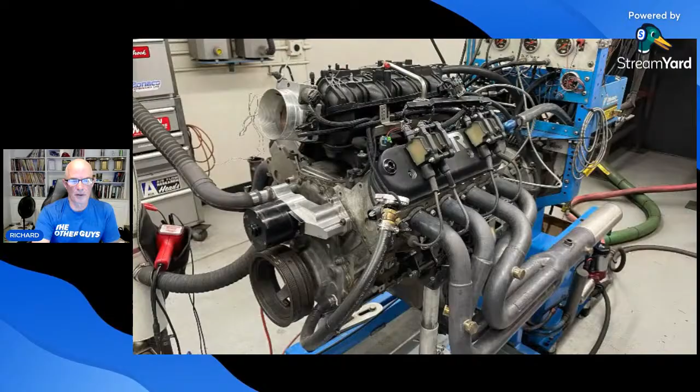We're going to take a look at different power curves of a couple of different turbos. We ran a GTX 3584 RS turbo and a G42. Mostly what I wanted to talk about was showing you the power curves of these things. In fact, this will end with a demonstration of the power curves. You can see we have the NA power curve down at the bottom there. This one was with a G42. Let's check out this one here.

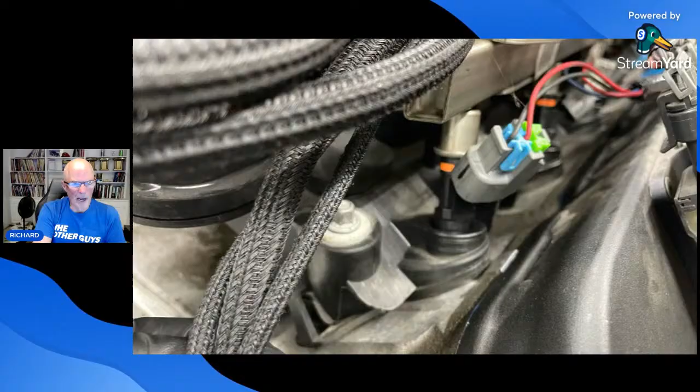The motor was my aluminum 5.3. We had a Trailblazer SS. We had my low buck truck camshaft in it. We had the 1000cc injectors. We had that G42 turbo. Stock exhaust manifolds feeding a Y pipe. We had our little boost controller there. You can kind of see the setup there going in. And for some reason, I used the same power curve on both of these, unfortunately.

But the thing I want to talk about is we take a look at raising the boost and we have our NA power curve. We raise the boost, the power curves are basically staying consistent. So this thing is making peak power when it's NA at 6,000 or so, and it basically holds level in terms of power almost out to 6,500 with that particular camshaft, the low buck truck camshaft. The Trailblazer SS had stock heads on it, it was on a 5.3. And we see when we add boost, if we can get the boost to stay consistent, it kind of mirrors that.

And so the question becomes, well Richard, what if I want to - first of all, do you want that kind of curve? Do you want to be making peak power at 6,000 and have it hold steady out to 6,500? Do you want peak torque occurring at 4,700 or 4,800 RPM? This thing made more than 900 horsepower fairly easily with the G42 at like 15 pounds of boost. And then it made more than 800 with the smaller turbo at a similar boost level, only because we're getting up near the flow limit of the smaller turbo in that instance, and we're not anywhere near the flow limit of the larger G42 turbo.

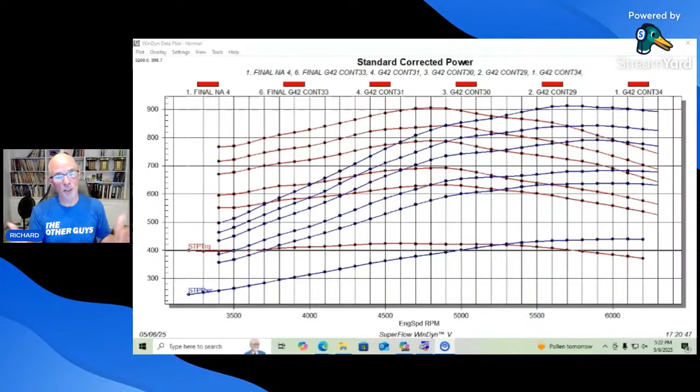This one had a Trailblazer SS, which is a long runner factory style intake manifold. Makes really good average power production. I mean, even down near 3,000 RPM, we're making 750 foot-pounds of torque. So it's a lot, it's tire roasting a lot. So when the boost is turned up, you have some room to make less torque down there if that's what you want to do. 750 foot-pounds, if you've got a 3,000 RPM stall converter on something and you nail the throttle with 700 or 750 foot-pounds of torque, it's going to spin the tires a lot.

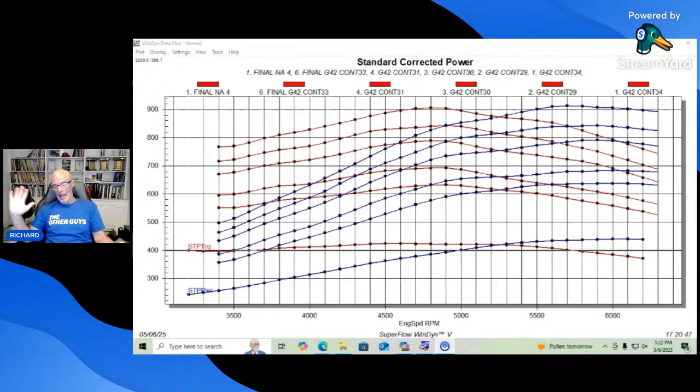And so if you were thinking, okay, well, I could afford to give up a little bit of that, and now I want power to happen out at a higher RPM range, you put a shorter runner intake manifold, the BTR Trinity intake manifold. Shout out to the guys at Brian Tooley Racing. We are a dealer, by the way, if you guys are interested in BTR stuff. Richard Holdener Performance, where you can go get the turbos that we use in this and the camshaft and springs and all that. We have the BTR stuff.

So you could put a short runner manifold like a Trinity intake manifold, an equalizer, a Holley low ram, a high ram for that matter, if you have the hood clearance that you want to put that kind of manifold on there. The nice thing about a low ram or Trinity or others that have those kinds of things, or the Sniper style intake manifold, that fabricated one that's so popular out there, fabricated intake manifold that is still fairly short runner, that will fit under the hood.

And a lot of times that's the thing. I'm sure that's why the guys at BTR sell so many of those manifolds, is guys want a short runner manifold that they can run more RPM with, that will also fit under the hood with a boosted application. There's no boosted intake manifold, by the way, there's just intake manifolds. But if you want to run higher RPM, a shorter runner manifold will allow you to do that. It's going to lose power down low because that's what they do, but it will gain power out at the top and allow you to now have your power peak out at a higher engine speed than we have here.

Ideally, you'd team that also with some kind of bigger camshaft. A 212 camshaft, even with a short runner manifold, while it will carry power farther than we're showing here because of the manifold runner length, it's still not the ideal choice. You want to step up in camshaft, going from this to the Low Buck Truck cam we have at Richard Holdener Performance, or a Truck Norris from BTR or Chupacabra, that style of camshaft. We call it a truck cam, and there are hundreds and hundreds of these that have been sold across all brands of this style.

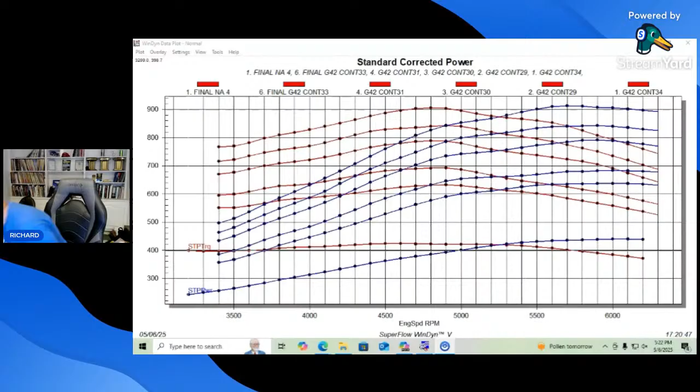But if you team the short runner manifold with a camshaft that wants to make power at a higher engine speed, like a BTR hot rod cam or a BTR red hot cam, that kind of thing pushes power out. There are lots of other cam manufacturers with stuff that can do that too - push power out farther in the RPM range.

What you're doing - and this is something guys doing turbo builds often never look at - is changing the effective operating range of the naturally aspirated motor. So we'd see a change in the NA power curve, which is why I always include the NA power output first and then extend it out. And that's exactly what happened - we'd now be making power out farther in the RPM range.

The horsepower and torque wouldn't be comparable - we'd be making more horsepower than torque, because torque drops and horsepower increases at a higher engine speed. Then when you add boost, since we've changed the NA power curve, the boosted power curve still looks like the NA power curve, but since the NA curve changed, the boosted power curve looks different too. So again, it would look like this.

We'd have railroad tracks at different boost levels. It's just that now, with our new combination of a short runner manifold and more camshaft, instead of making peak power at 6,000 or 6,200 or 5,900 RPM, we'd be making peak power at, let's say, 6,800 or 7,000, depending on how big the camshaft was. We lost power down low, but we're making peak power there - it's not falling off, it's staying within a certain number of horsepower out to 7,500. And now we have that power curve shape.

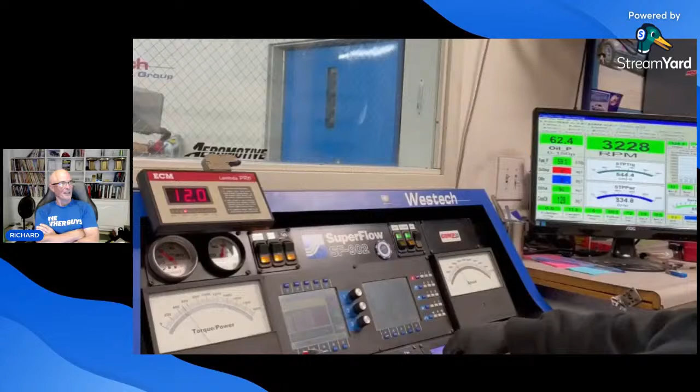I really would like to run the K series again. That would be kind of cool. I need to put it back together. I think we took it apart to put ring gap in it, and then to put ARP head studs on it, so that we could run boost on it.

I really kind of want to run it. I think we only ran it up to 600 or something like that, but it was fairly low boost. But it was the same kind of thing, railroad tracks.

Northern California is probably like Gold Coast weather. It's nice here. I mean, it gets cold, not too cold, you'll get in the 40s sometimes. We have gotten snow here. We get hail here, but that's a rarity. Like I said, 40s, sometimes it gets freezing overnight. You go outside in the morning and your windshield's all frozen over. And then it does get hot here, gets 3-digit stuff a bunch.

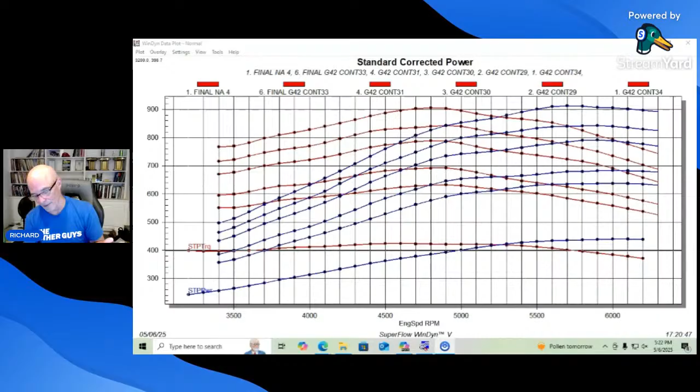Have you tested a ported Trailblazer SS? I have not. I don't think you'd see too much on a mildly built motor, just because it's all about the needs of the motor. Does the motor need a whole bunch more airflow? We know that those Trailblazer SSs, we've made certainly 550 horsepower. So at 450 horsepower, does porting really help that much? It's like testing ported heads. We tested the ported LS3 heads on a kind of stock motor, and it was worth like 10 horsepower. It's not because ported heads aren't good, they are, they work really well, but it's because the rest of the motor doesn't need that. So I would think it'd be more beneficial on a higher horsepower motor.

6-liter S475, L96, EFI, high ram. Don't mind a loss of low RPM torque. We'll pick a torque converter on boost response. Want a smooth idle, shift around 7,200. Okay, yeah, that would be fine if you don't care about the low speed loss. An LS9 and that big T6 turbo are going to be soft down low. The LS9 will have a nice idle, it will make power, it's a reasonable cam. It will make power at a higher RPM, let's say, than the other factory cams. But it's not going to make... shift at 7,200, I don't know, it's going to continue to make power out there though.

I could use some help with building my GT, it's a non-PI like you said. It's better to have... I got fully ported heads you recommended, the only thing I'm confused with is the size cam. I don't know if what you're saying is that I somehow told you to get a non-PI, I wouldn't have told you that. What I would have said was, if you combine a non-PI factory short block with PI heads, that's a better combination than either one of the other two, because you get higher compression, because you're combining the right piston with the right chamber volume.

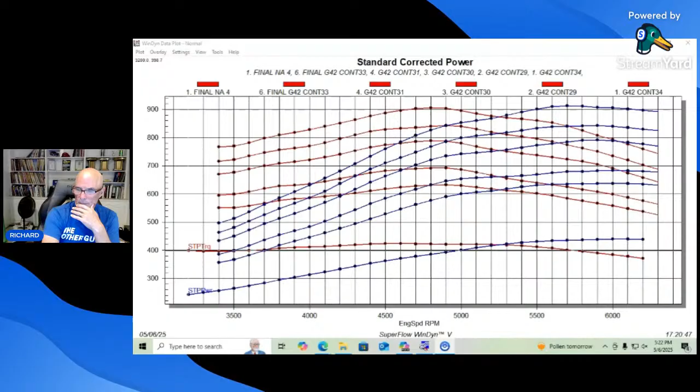700 wheel horsepower is the end of the smaller turbo, and 800 wheel is definitely get the G42. Get our G42 turbo, and you can go up to 1200 flywheel horsepower. It has a V-band exhaust, and for that size turbo, it's really responsive.

What plays the biggest factor in piston to valve clearance, lift or duration? Lift has almost no effect at all. Duration has an effect, and actually the valve event, when it's happening. So if you have a long duration on the intake side on the LS, on the exhaust you can get away with 20 degrees more, certainly 15 degrees more duration. On the intake side, duration, and then LSA, like when you're opening it.

What could you recommend cam-wise for me to later add nitrous to and still have a really nice lope until I get that part of the kit? Want to make 350 NA and figure the 100 shot to be 450. Zach, what is your motor combination?

Any camshaft works with nitrous. So pick the camshaft for what you want the camshaft to do, and then just add nitrous to that.

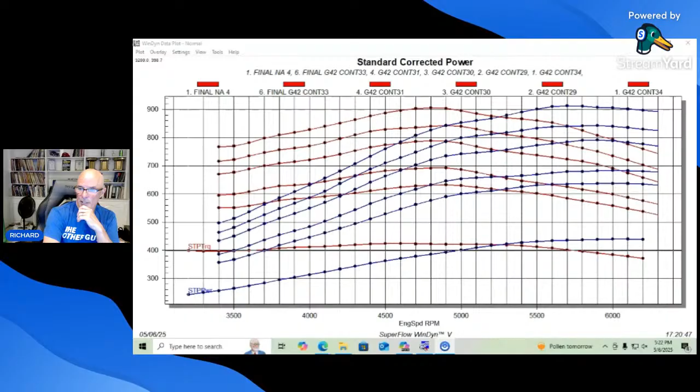6-liter sloppy stage 2 - yeah, that cam will easily get you there. It wouldn't be my choice for a driver, but...

I've installed a few sets on 99 to 13 trucks with no fitment issues, and have a set on my 14 L83 truck, and they fit great. On the Speed Engineering stuff, the only issue is the band clamps they provide are not good. They leak, so I cut them off and V-band them. They don't have V-bands on them. V-bands would definitely be the way to go.

700 wheel horsepower goal on an LQ9 with a turbo - what do you recommend for stock 317 heads? Valve springs are in mind for sure. For 700 wheel horsepower, I would pick the G42 turbo, because you're going to go up from there, especially on the 6-liter.

So you could pick this low buck truck camshaft, or the Truck Plus, depending on if you want to do a converter and stuff. There are honestly lots of camshafts that will do this - these are the two that we sell. You could even do it with a smaller ripper cam. Any of those camshafts will take you to 1200, 1300, 1400, 1500 horsepower. They'll also idle good, they'll be better for a driver, and more responsive for the turbo.

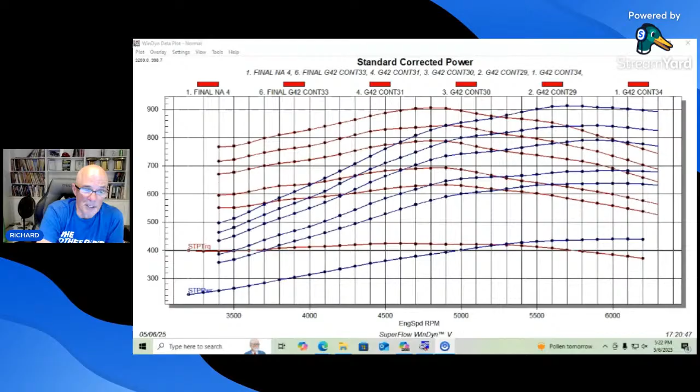Do a video on your Truck Plus cam under boost with a 6-liter. I think it would be just fine for low end power, but curious on your input for sure. I don't know - I think when we were running boost on the 6-liter, we ran it with the Lobuck truck camshaft.

Let's see here - cathedral port, 6-liter. Turbo, file, test description. Yeah, we didn't run - we ran the Lobuck truck camshaft in that, and not a Trailblazer or a Truck Plus camshaft.

But you can see what the difference is between the Lobuck truck and the Truck Plus. The Lobuck truck makes a bunch more low-speed power, and the Truck Plus makes more power above 5,000. You can see from these power curves that the boost just elevates that - it's the same everywhere. So under boost, one of those would make more power below 5,000, and the other one would make more power above 5,000.

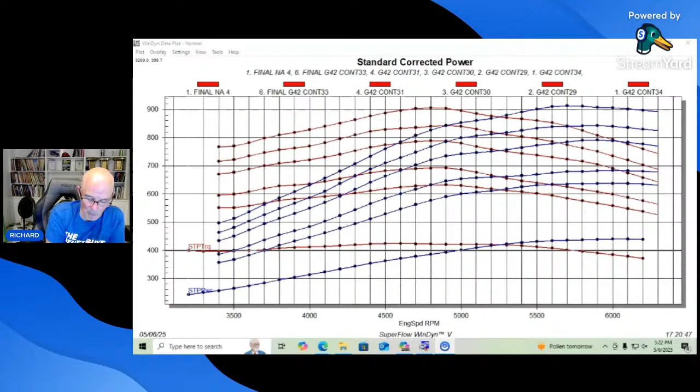You could do that. My dad's wanting me to cam his 2012 Denali. He doesn't want super choppy idle. Would you recommend a low buck truck or truck plus? The larger 6.2 will soften it. Yeah, it definitely will soften it over the other camshaft. That Ripper camshaft will have a better idle. It won't make the same power curve, but it will have a better idle than the low buck truck will.

Don't know the specs, but a Stage 2 turbo cam, 6-liter, VSR T685 turbo would be a good combination. Swapping a T4 78 to an 85 currently. Yeah, all of that works fine. The Stage 2 turbo cam is like bigger than I like to put for a street driver because of the response rate, especially with a T6. But I don't know what kind of converter you have and all that.

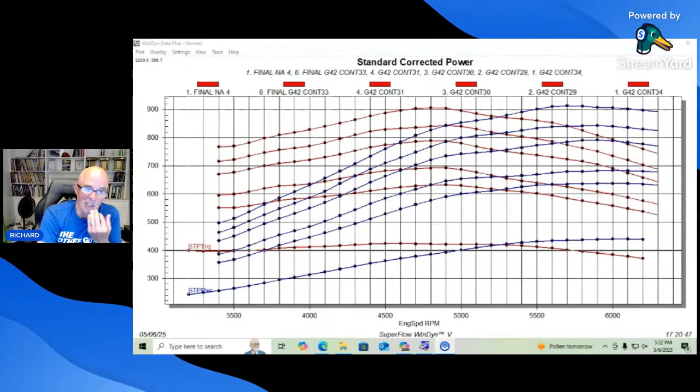Richard, your testing is an unbelievable gift. Thank you. I still hate exhaust side V-bands. So I found a way to weld them without leaks. Oh, okay, yeah. Even a little bit of a leak though? We don't care about that, at least on the dyno we don't.